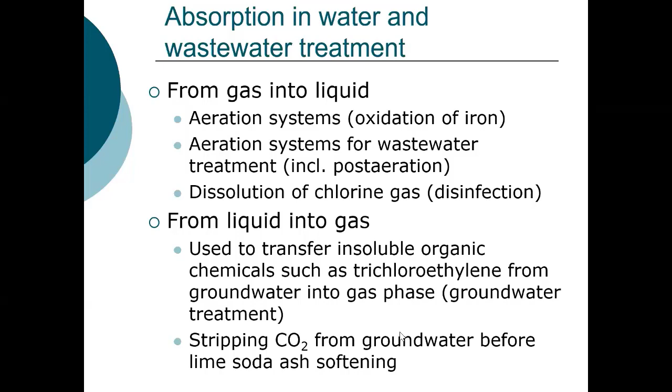And then we also mentioned with groundwater that if the CO2 level was too high, then remember reaction 1, which was the neutralization of CO2, produces a significant amount of sludge. So if that CO2 level is too high, then we want to strip that CO2 from the aqueous stream before the water flows into the rapid mix basin, followed by flocculation. So all of these involve some sort of mass transfer across the air-water interface.

And this is the model that I'm showing here. So if we look at this, in this case, it's written with SO2. Okay, so if we have SO2, in this case shown in the airstream, we can dissolve that and transfer that from the airstream into the aqueous stream. Once it's in the aqueous stream, it would react with water to form H2SO3.

We can think about this in terms of oxygen. So we have oxygen in a gas stream. That oxygen can be transferred across the air-water interface. So we have oxygen in an aqueous stream. So in all cases, what we're looking at is the transfer across this air-water interface.

And the rate of transfer is a function of the temperature. We'll write it in terms of oxygen, but the partial pressure of oxygen or the partial pressure of gas, the concentration of the oxygen in the aqueous stream, the mixing efficiency, and the composition of the water. These are among the factors that will affect this rate of transfer. And you can think about it in terms of oxygen.

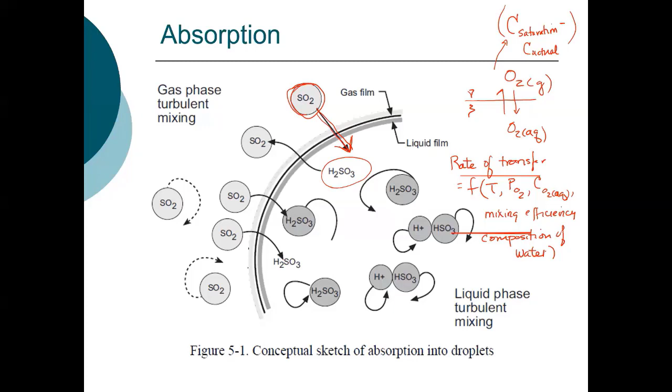So in terms of absorption efficiency, or really mass transfer efficiency, in an engineered system, the ratio of the flow rate of the liquid to the gas will affect efficiency, and we'll look a little bit at this. The solubility of the gas plays a significant role, and we talked about this in terms of the effect of temperature on oxygen solubility. So temperature plays a significant role. That contact, and we talked about that in terms of the oxygen level in the Red Cedar upstream of the rapids and downstream. And the other thing is the composition of the water or the wastewater.

What you will find, for instance, if we look at any sort of mass transfer unit, the mass transfer efficiencies are actually determined using pure water. It's not determined using wastewater. But what you'll find is that the transfer efficiency decreases when you move from water to wastewater. The efficiency is actually less.

We didn't talk about designing aeration systems. I believe that's covered in ENE 804. So for any of you that are either in the BSMS program and will take 804, you'll learn about that there. Or if you plan to go to grad school in environmental engineering, you will most likely have a course in biological treatment where it's covered.

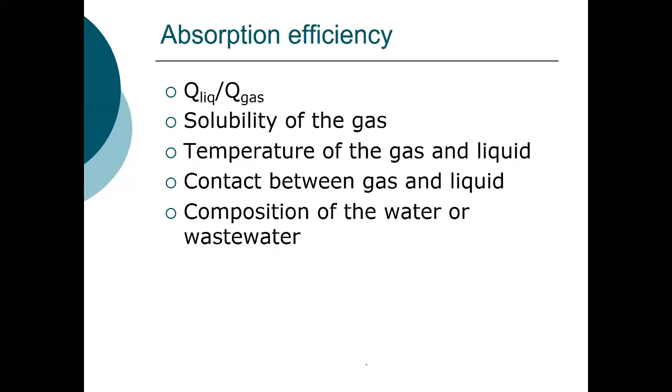And I've mentioned some of this, but reiterating, we can use air stripping to transfer volatile components from a liquid stream to a gas stream. Again, typically we're looking at, for instance, a groundwater remediation project where you have BTEX, trichloroethylene, tetrachloroethylene, and these are chemicals that are sparingly soluble and have a high Henry's law constant.

Ammonia is another chemical that can be removed. This is pH dependent. What you're removing is ammonia, not the ammonium ion. The pKa is about 9. So if you're looking at removing ammonia by air stripping, you would have to increase the pH above 9 so that the ammonia is in the form of ammonia, not ammonium ion, and then could strip the ammonia.

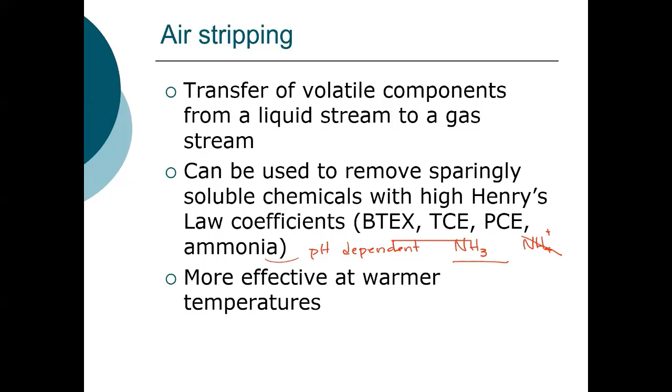Typically with these types of systems, they're more effective at warmer temperatures. That's not true for oxygen, but it is true for removing these volatile components from a liquid stream, so from groundwater. There are a number of types of units we can use.

We can use spray towers. Spray towers have no internal components except these spray nozzles and the connecting piping. These can be used for volatile gases, for instance, hydrogen sulfide, vinyl chloride. It can be used for CO2 stripping from a groundwater before lime soda ash softening. Notice these are typically a countercurrent system. So you have air flowing from the bottom, air flows up, your liquid stream flows down.

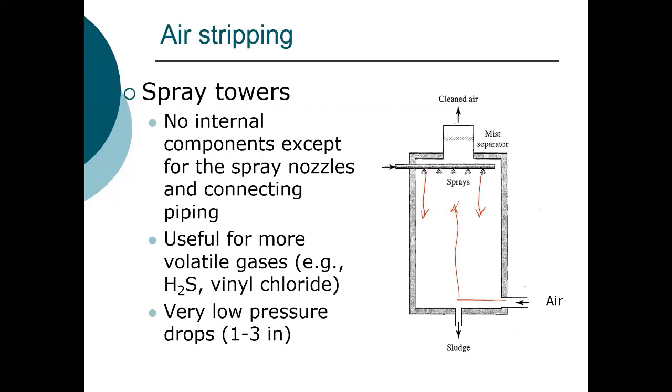And these are useful. They have very low pressure drops, so for very volatile chemicals they can be used. Tray towers are useful for chemicals that are not quite as volatile as vinyl chloride or hydrogen sulfide. They provide good contact, and what you have are these trays here, and the air flows, typically from the bottom up and out the top. Water typically flows downward. So you're pumping water up and then allowing it to flow down.

These are reliable. They're used for CO2 stripping in groundwater systems. They can be used for removal of chlorinated solvents from groundwater. They can be used for BTEX removal, etc. Okay. The equation, I gave you the equation here. It's actually provided in the FE handbook.

And it just simply says that the concentration in your water leaving, so this would be Cn, where N is the number of trays, is equal to C0 times 10 to the minus K, which is a coefficient provided by the manufacturer, typically ranging from about 0.12 to 0.16 for CO2. It's specific to the contaminant. And then times the number of trays. So this can also be used to determine the number of trays that are needed for a tray tower.

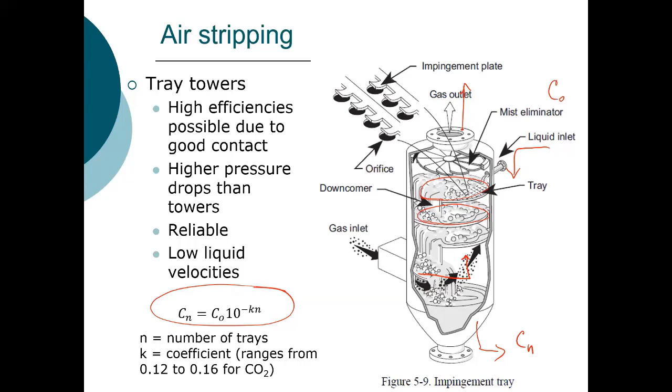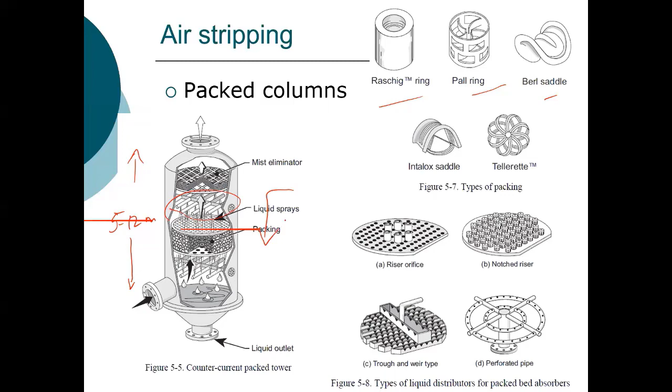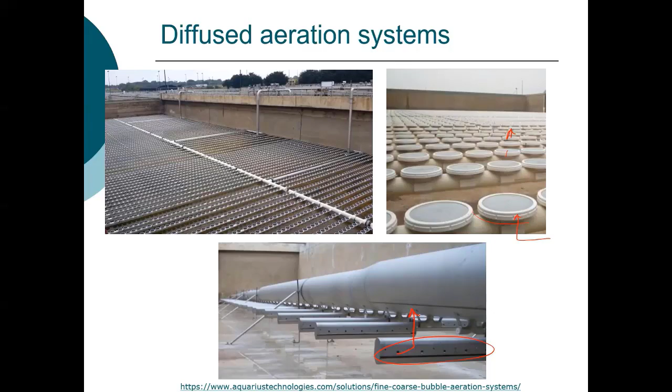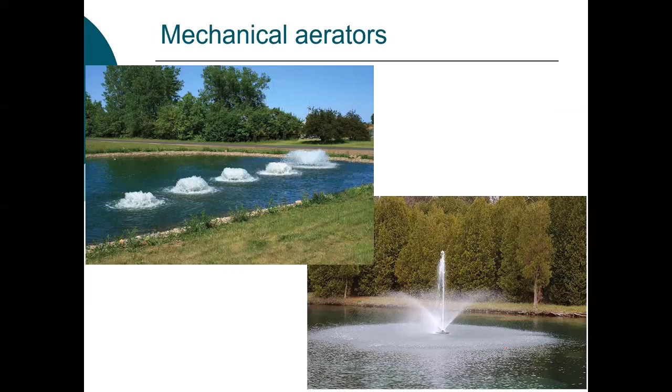You can also use mechanical aerators. These are shown in ponds. These can be used in lagoons for treatment. You're using some sort of mechanical aeration in order to impart or add that oxygen into the water.

These are cascade aerators. The one on the left is actually a photo that Craig Tatara had sent from the Genoa Osceola plant. And you can see the water's just cascading down this stream. And as it does, it's adding oxygen. And there's another picture on the right.

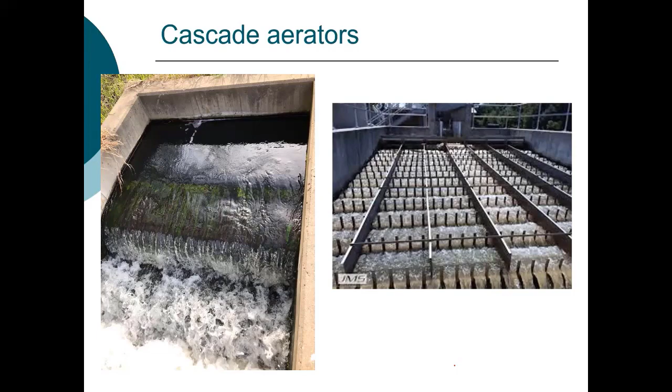Any questions about any of these types of systems that we use to transfer either a chemical from the water to an airstream or from the airstream to the water?